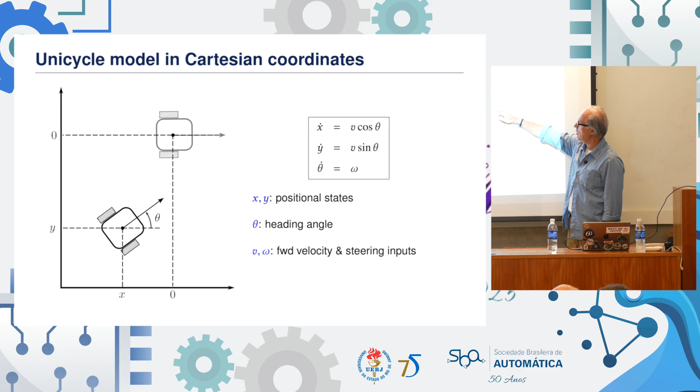Everybody knows this model. The unicycle model, 3 states, the position x, y, the heading theta, 2 inputs, the longitudinal velocity v appearing in these 2 equations, and the angular velocity or steering omega. If that's the model from which you start, you just can't get very far. It turns out that the right model, and this has been observed in robotics as a footnote in 1995 and never paid attention to almost at all in the control literature. That's not the right model for control design.

The right model is not the Cartesian representation, but the polar representation. I'm not talking about something tricky. I'm talking about something very, very basic. Why would you be married to the Cartesian representation if the polar representation gives you advantages? So I'm changing the representation from x, y into rho, which is the distance from the parking destination, and delta, which is the angular component of the position relative to the parking target.

And now I get this system. Now that system you're unlikely to have seen before. But that is a system that is just God sent for solving parking problems. It's a strange system, though. There is a division by the state rho, which is the distance from the target, and there is a singularity at the parking target position. That singularity, rather than being a headache, will be God sent for the design. It'll make the design possible and meaningful.

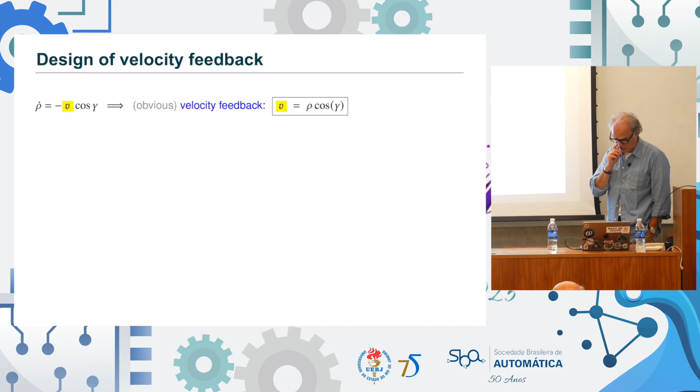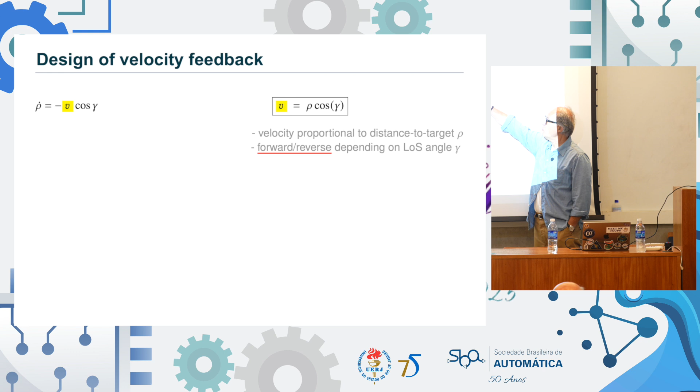Now, when you take this feedback, you're also including the cosine of the line of sight angle gamma. I'm sorry, I did not emphasize what gamma is. Gamma is the line of sight angle of the vehicle relative to the target position. You're introducing this cosine, and for a moment you think, well, that's a mess. But it's not a mess, it totally makes sense. It means that you are going to go forwards or in reverse depending on the line of sight angle.

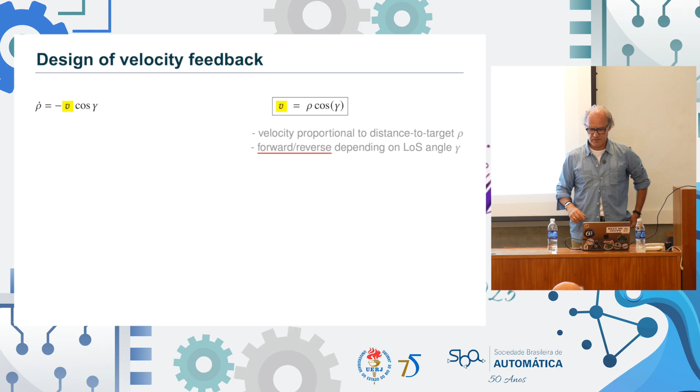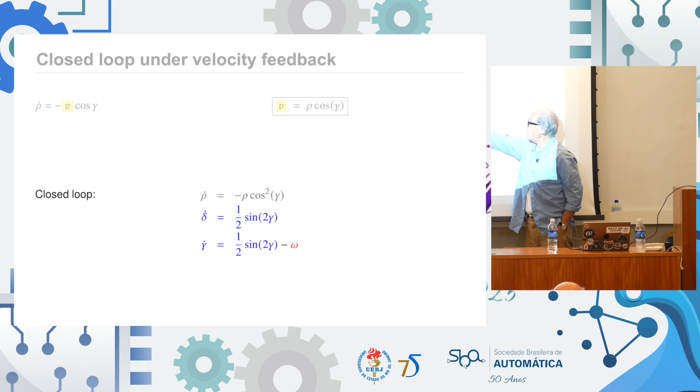If I'm oriented this way and I want to go to Tiago's position, I'm faced somewhat away from him. I'm going to go into reverse. I'm not going to go forward. That's like the roundabout way to go to the target. So it makes sense. So I'm finished with the design of the forward velocity feedback. It's this. And now I'm left with two state equations.

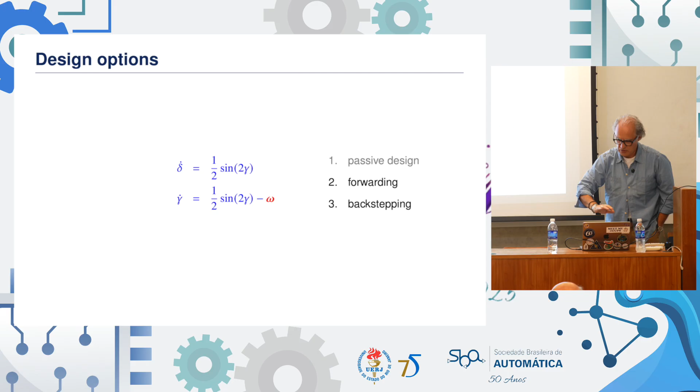Let me just dispose of the first one. This is the system. It's a second order system. You take a look at it. It's nonlinear. It's not in the conventional strict feedback form. It's not globally feedback linearizable. It's a bit of a strange but elegant looking system. And it's perfect. You can't do trivial things with it, but it's only two states. You can do interesting, non-trivial things with it.

And basically, all of the three major tool bags for nonlinear control designs apply. You can do a passivity-based design, you can do a forwarding-based design, and you can take the strongest of the hammers, backstepping, and you can use that design. The outcomes are different, the feedback laws are different, and I will walk you briefly through that.

Now, first, before I show designs, let's talk about the state space. The state space is actually the designer's choice. It's up to the designer to decide whether they're going to think of these angles as living on the interval from minus pi to pi or on the whole real line. This is somewhat of an aesthetical choice. It has some practical consequences, but it is a choice.

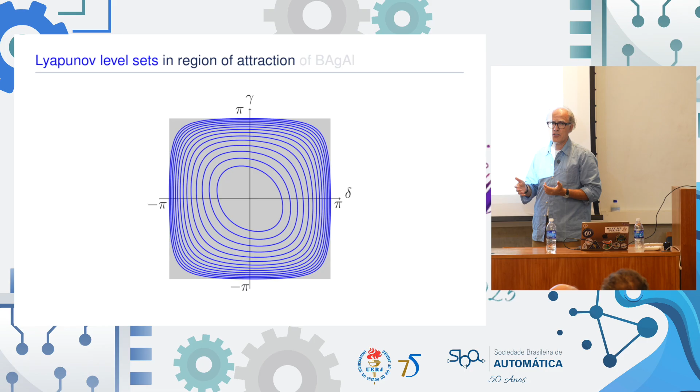If you take the torus and slice it and unwrap it and place it on the plane, the Lyapunov stabilization that is almost global is in fact the construction of a control Lyapunov function that has level sets like this. Because those two circles are excluded and those two circles represent actually the edges of this square, you see how the level sets are getting denser, and you have global stabilization on this square as reflected by these Lyapunov level sets.

All right, let me now show you some controllers. I said 3 design methods: passivity, forwarding, and backstepping. I will show you an example from each of these 3 families of designs. Now, in each of the families of designs, you can pick the state space to be R2, or to be the torus, or to be one of the 2 cylinders. You have many, many possibilities. So I can just give you some examples. Let me start with an example of a passivity-based design on the torus.

There is no time to explain how these designs are derived. I just have to bang these designs, and if you're from the nonlinear control world, they may begin to make sense to you. If you're not, then not even that is possible, but we will still get something out of this. So when it comes to passivity, the passivity-based control approaches are based on physical energy functions. And the physical energy function, the potential energy in the angle space on the torus, happens to be the sum of these squared tangents. The tangents exclude the point plus minus pi from the state space. So the tangents are exactly what you want. So that is the physical potential energy.

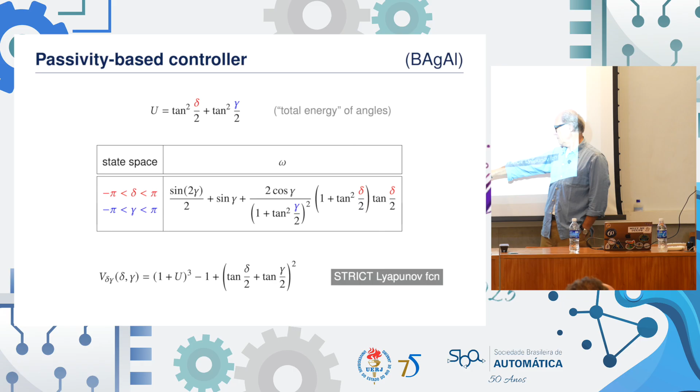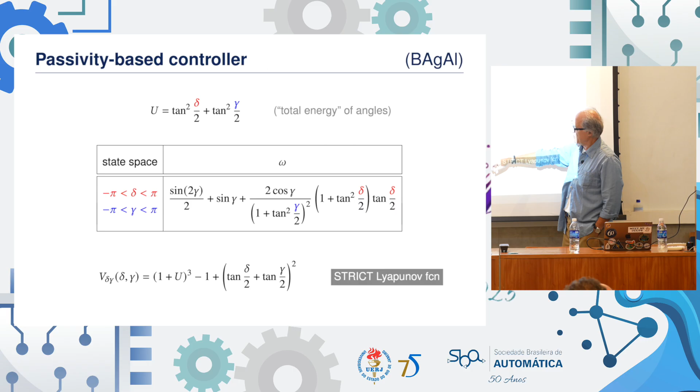Something that is relatively simple is this summing up of the tangents and squaring of that. But then U, the original potential energy, needs to be included with a sufficiently high power, namely with a sufficiently high emphasis. And then this Lyapunov function is strict. This V dot is negative definite under that control. All right, let me speed up now a little bit.

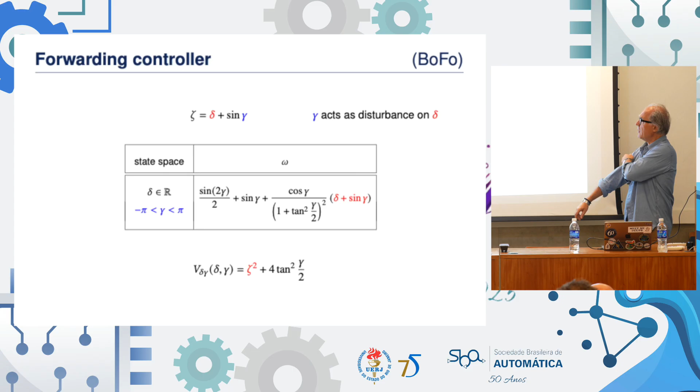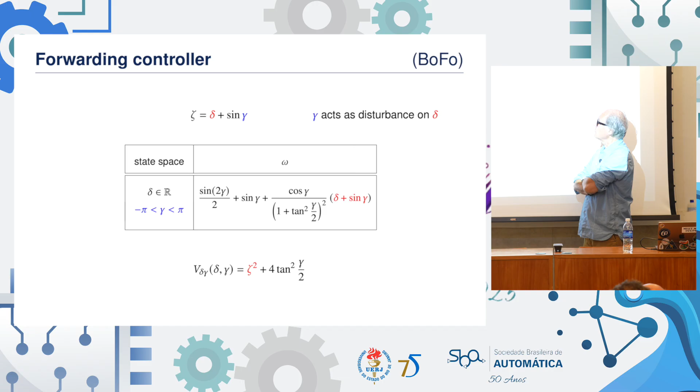The second of the three control families is forwarding. Forwarding takes the state in which the control does not appear and applies a very intricately cooked up transformation to that state. So the state on which the angular velocity does not directly act is delta, the angular component of the position. And there is a transformation.

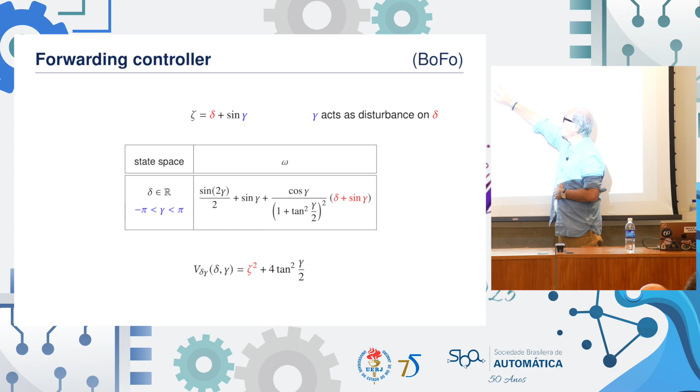This transformation looks simple, but it's arrived at, if you know forwarding, in a very complicated manner through some explicit solution of some closed loop system, the explicit integration of that closed loop system, the various things. And then at the end, what pops out for the unicycle is something beautifully simple as the sine. The feedback law on a cylinder, namely taking one of the angles to be on a circle and the other one to be on the whole real line, happens to be this feedback law.

And again, it's hard to make sense out of this in any detail, but it is nearly globally stabilizing, and that is so with respect to this control Lyapunov function. This, the time derivative of this, is strictly negative definite.

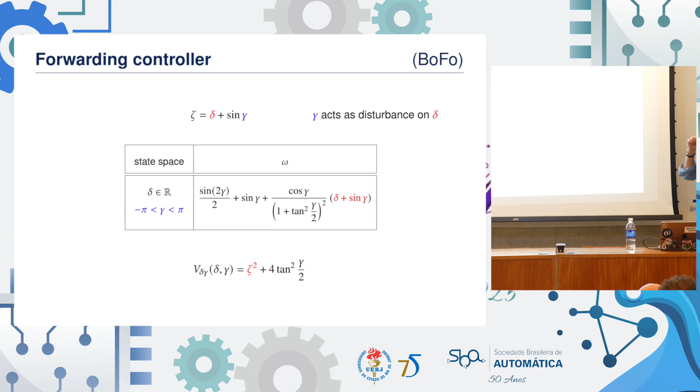And finally, the backstepping design is in some way kind of dual. So the state that is directly affected by omega, the steering, is what is being transformed relative to the other state. The feedback law that results from introducing a transformation like that is this expression. Again, a whole bunch of sines and so on, but not everything is trigonometric. There are parts that are linear because we're not on a torus, now we're on a cylinder.

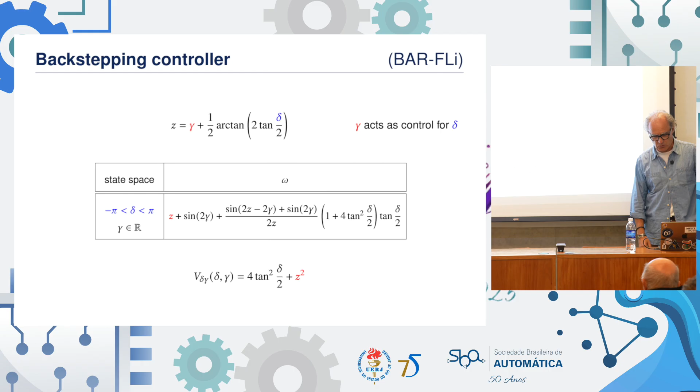And the control Lyapunov function, which is strict, is given by this sum of the squared tangent and the squared transformed state z. Now, what does one get as a theoretical result? What is the theorem? The theorem is global asymptotic stabilization in the particular norm on the respective state space, which if the state space is R2 for the angles, it's R2. If the state space is the torus, it gets a little more complicated. I'm dropping those details. There's nothing complex about that. The result is global on the respective state space in the sense of having a class KL estimate on the solution. All right.

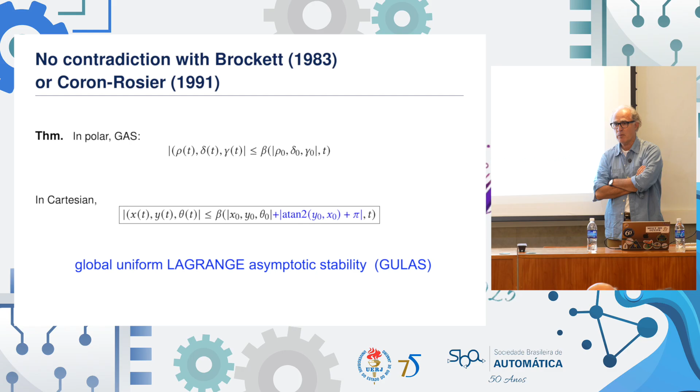Had Brockett thought that that's a possibility, maybe within a few years this would have been achieved. But Brockett set what would be without the blue term as an impossibility, and the unachievability of that was the result of the succeeding efforts.

By the way, if you're Hungarian, to you this is pronounced as goulash. So that's the dish I serve you today. It's pretty spicy because it's uncommon.

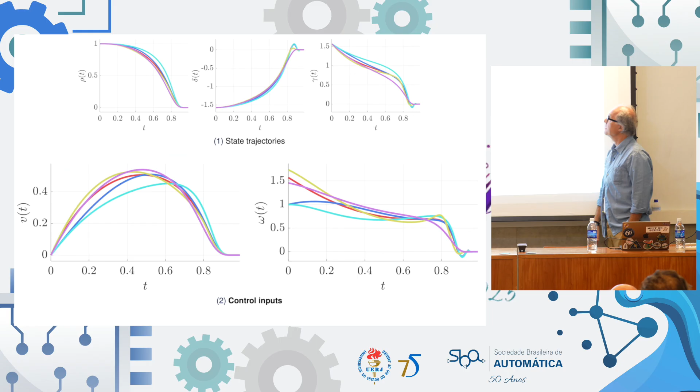You can see it in action here in polar coordinates. The distance, the angles, everything goes to 0 and lands infinitely smoothly at terminal time to the destination. The more interesting part is looking at the control inputs. You see how both control inputs are not only bounded, but they also go to 0 and do so with infinitely many derivatives going to 0 as well.

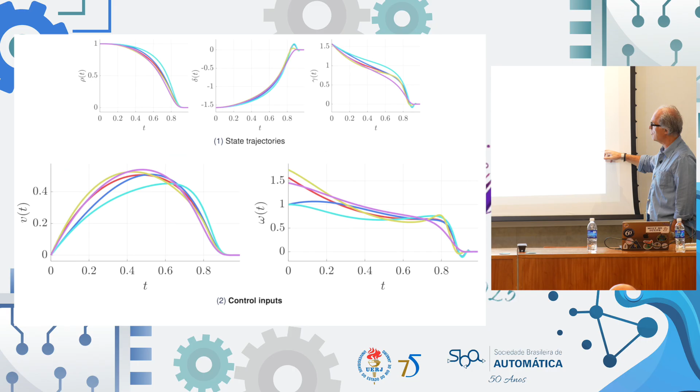Okay, now immediately, we have to ask the question, can finite time and fixed time stabilization be achieved without these gains that are taken to infinity? Can it be achieved with non-smooth means? And the answer is, yeah, that is doable as well. Instead of gains that go to infinity as functions of time, it's these gains that are non-smooth that enable the fixed time stabilization outcome.

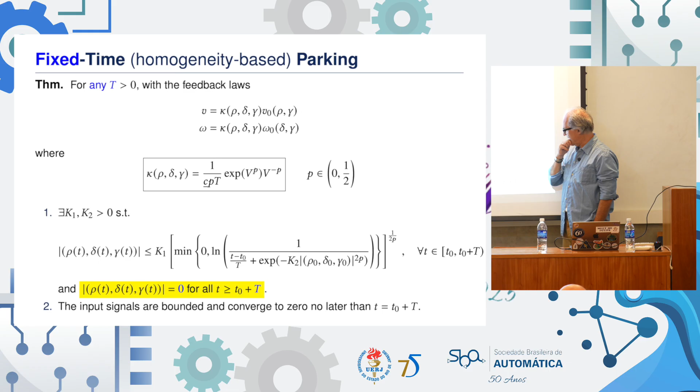And the fixed time stabilization result is formulated with this class KL estimate, which goes to 0 no later than time capital T, and it's identically 0 from the time capital T onward.

And that's supposed to resonate with Jorge Poveda, who has pioneered extremum seeking in prescribed time with me and with Professor Bashar. Now, which one is better? I will not declare the winner here.

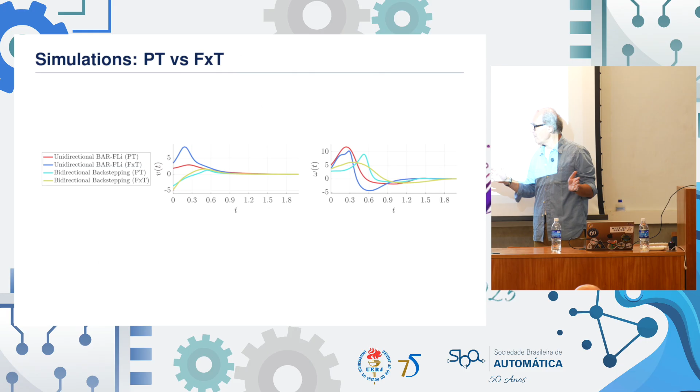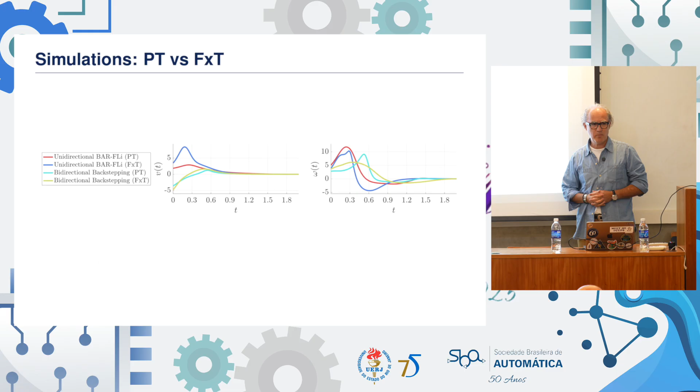You can stare at these trajectories using PT or using time-varying or non-smooth approaches. I claim that by adjusting different parameters, they can both work comparably well. There is no winner here in terms of performance, nor in terms of the control effort. That is my experience so far with this.

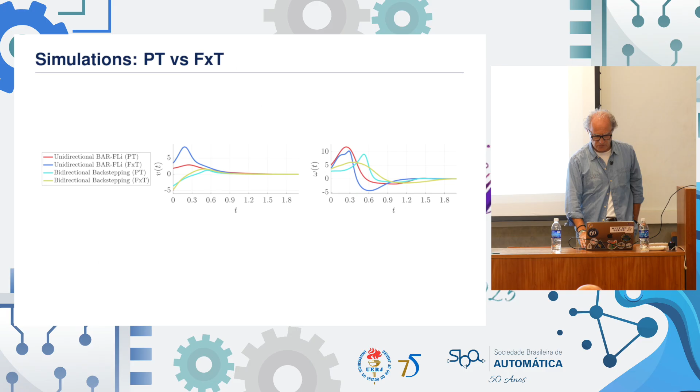When it comes to noise robustness, there's a difference. Neither one is super robust, but time-varying is sketchier in that domain.

All right, let me now return to Lyapunov stabilization and inverse optimal control. So now I'm going to be designing a completely different family of stabilizing controllers, which are not just stabilizing but also optimal. And I need to make it clear what are my control Lyapunov functions. I've shown you control Lyapunov functions for only 2 of the 3 states, namely for the angles delta and gamma.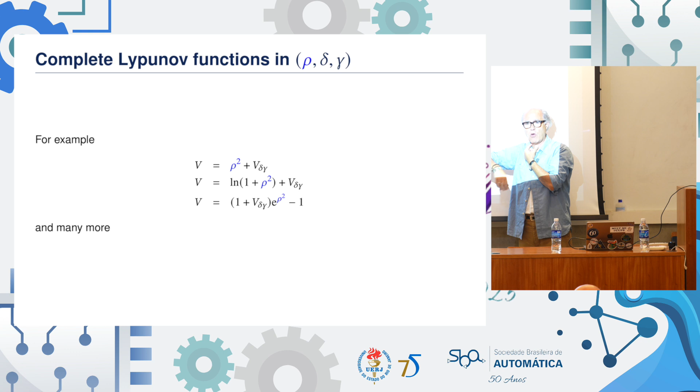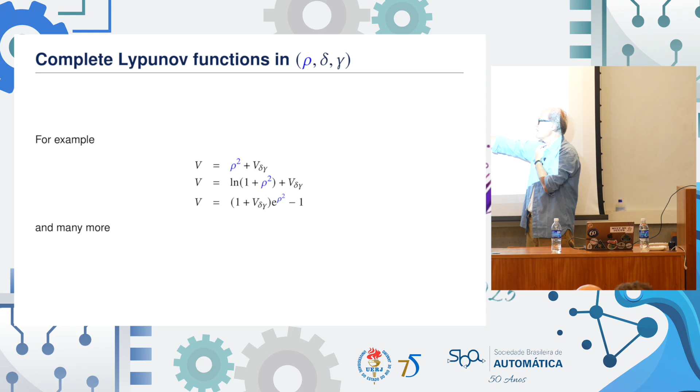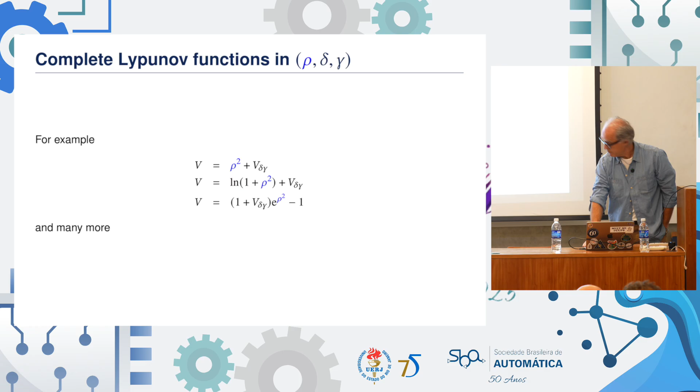But rho is also a state. The distance from the target is also a state. So I have shown you complete Lyapunov functions, and they can be constructed in a number of ways. The simplest one being simply the sum of the distance squared and of these angle CLFs. But you can do more interesting things. You can involve the logs. You can involve these exponentials. This one's my favorite, and I will get to it one more time. And it's positive definite. Not maybe entirely obvious, but it is positive definite.

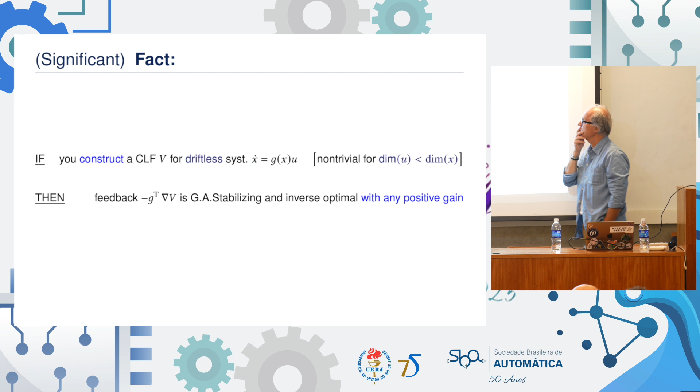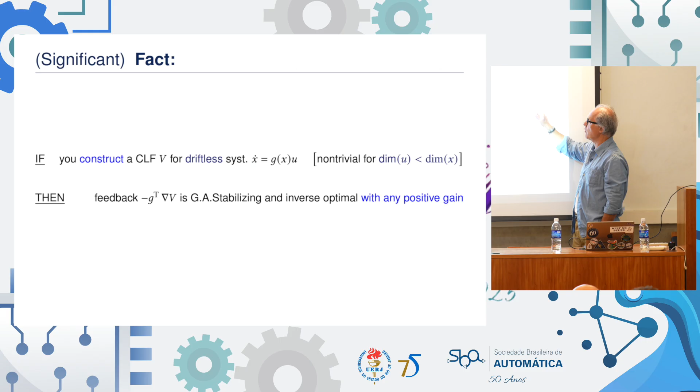Here is something that I've never seen observed, a very, very fundamental, crucial property I haven't seen observed in the CLF theory since Sontag's universal formula in 1989. If you don't have drift, if you don't have f of x in the nonlinear system, and if you manage to design a CLF, which for a driftless system is very hard, as you've seen, when the number of inputs is smaller than the number of state components, then

So thanks to this special property of driftless systems, you can take the LgV relative to both of these 2 inputs to the unicycle, the longitudinal and the angular velocity, and you can multiply them with any positive constant, epsilon 1 squared or epsilon 2 squared. And for any of these gains, no matter how large, but more interestingly, no matter how small, the feedback will be stabilizing, but more relevantly now for the inverse optimal discussion, the feedback will also be optimal for any of these coefficients.

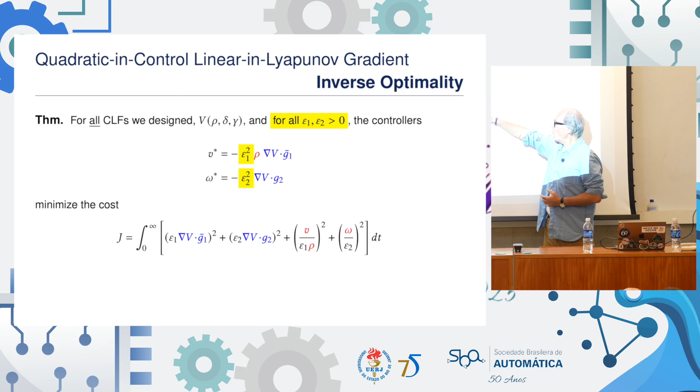How can all controllers be optimal? Well, each of these controllers is optimal for the respective gain which enters the cost function. If epsilon is very small, you're penalizing these inputs very heavily. If epsilon is very large, you're penalizing them lightly. And the state, the LgV contributions of the state respectively.

So I've just introduced for you a whole separate family of controllers. The original ones were stabilizing. These are stabilizing and optimal. Am I getting something different? And am I getting something better?

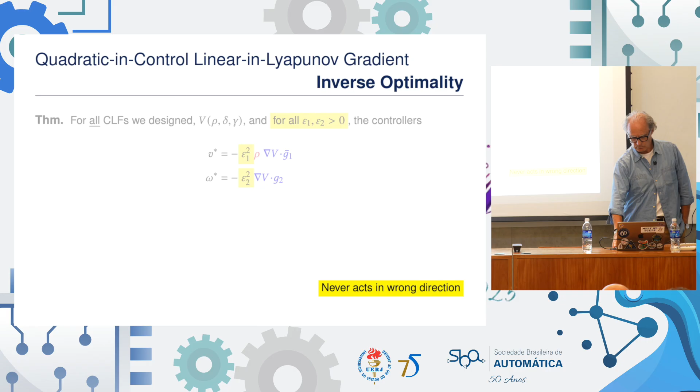The control never acts in the wrong direction in the control theoretic sense. I'm running out of time. Let me tell you something briefly.

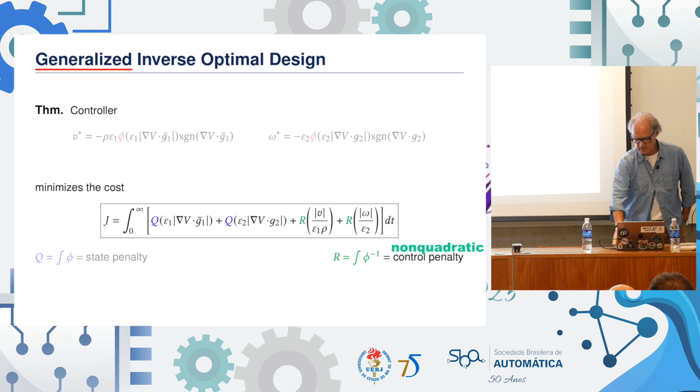If a controller has an infinite gain margin, can it be saturated? Can it be saturated to an arbitrarily low level? And the answer is yes, those things as well. Is it optimal? Once it's saturated, even that, it is optimal. So you actually can establish the stabilization and the optimality for the saturated versions of the LgV controllers, where phi, for example, can be the saturation function. This is harder to read on a quick read, but that's what it means, what I just said in words.

You can't steer arbitrarily fast. The Dubins vehicle is fundamentally steering rate limited. So I prefer this because it acts as hard as it can at its full steering capacity until it's done. And it actually happens to be done in finite time.

All right, let me now evolve this optimality story a little further. So you heard from Tamer about some very advanced forms of games. Let me now consider a game within the setting of parking. So still a single vehicle, still the same model as before, but now I'm introducing a disturbance that is matched with the angular velocity. This is an angular velocity disturbance.

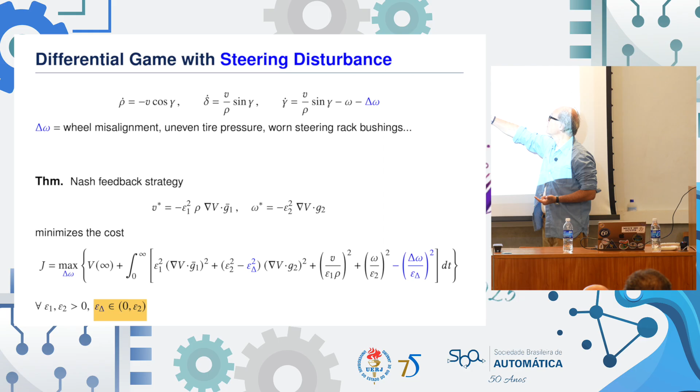Physically, what might disturb the angular velocity? Well, wheel misalignment, uneven tire pressure, worn steering rack bushings. Oh my God! When you think about all of these repairs, you don't want to think about going to your mechanic. But all of these things are disturbances to steering.

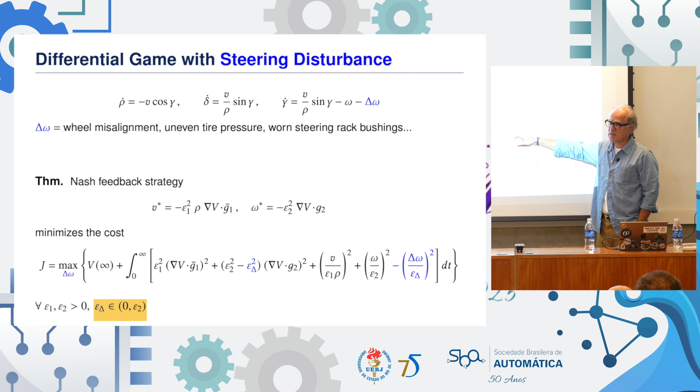So here's the theorem. Take the same feedback law that I've given you before in the absence of a disturbance. In the presence of a disturbance, this feedback law ensures integral input to state stability, and in addition, it ensures inverse optimality relative to this game formulation, minimax game formulation.

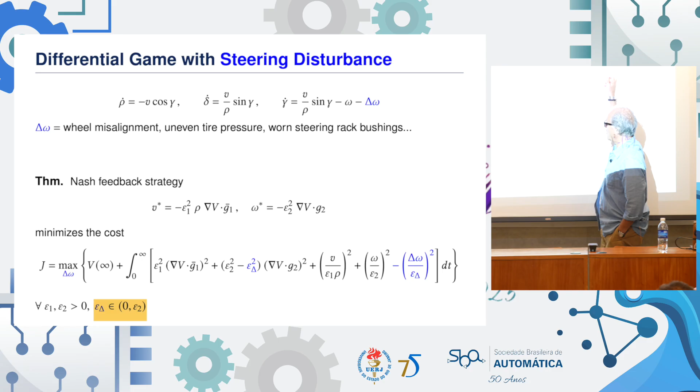This feedback law minimizes the maximum, maximized over the disturbance, of this cost function, which includes positive penalties on the longitudinal and angular velocities, and a negative quadratic penalty on these angular velocity disturbances, for a penalty on the disturbance that is in this range.

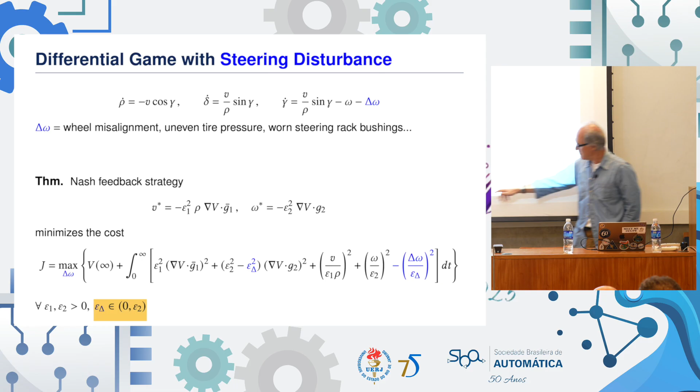Finally, let me tell you the part that I really like, maybe the most of all of this. So now let me come back to what I was saying, adaptive optimal control versus optimal adaptive control. So I'm going to show you a result in optimal adaptive control that is optimal over the entire horizon. The inspiration actually comes from Tamer's work in the very early 90s with two PhD students at the time, one working on H-infinity based adaptive estimation or identification, and the other one working on adaptive control, Didinsky and Pan.

So suppose now that the input authority, the driving authority, B1, is not 1. It's in fact unknown. I just don't know. I'm designing a controller. I don't know how powerful the engine will be. It's highly uncertain. And I also don't know how responsive the vehicle will be to steering.

And I want to use adaptive control. I'm robust to those uncertainties. But some greed for performance or for saving on the control effort is driving me to go even beyond robustness and to employ adaptation. So here's the answer to this.

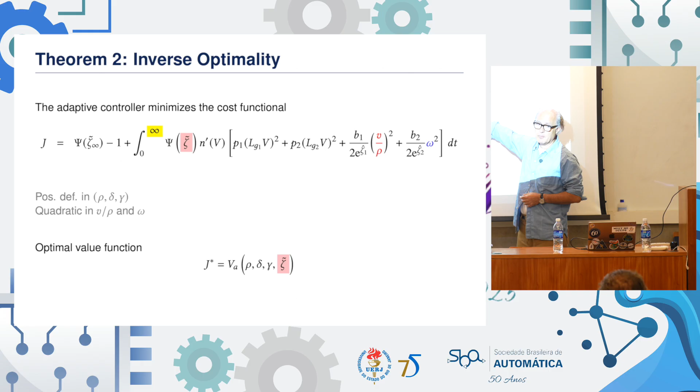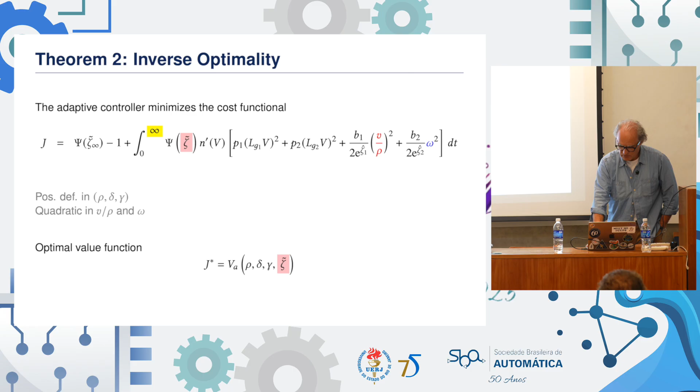So this adaptive controller is a minimizer not only of what's happening to the plant, but it's also a minimizer of the learning error across the entire horizon. This is why I insist optimal adaptive rather than adaptive optimal. And finally, since this is an optimal control problem, what is the optimal value function? It's that complicated expression on the previous page in which I emphasize its dependence on the parameter error. This expression, VA, the adaptive Lyapunov function.